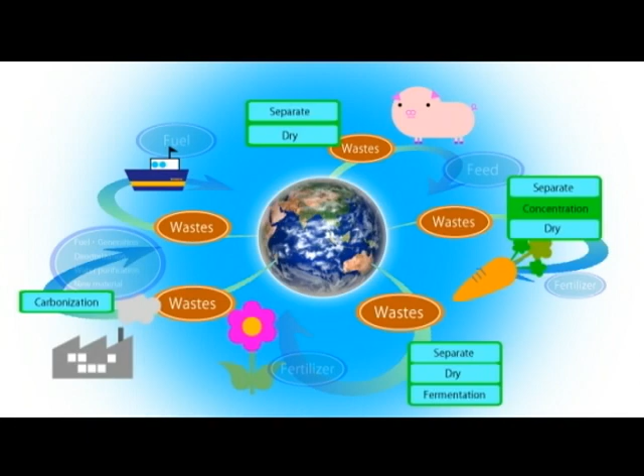In such a critical situation, it is an urgent task for us to effectively realize the 3R principle: reuse, reduce, and recycle. We can propose one solution of how to protect the earth, utilizing our 50 years of experience and know-how in this field. We can provide the most efficient equipment and systems to meet such needs.

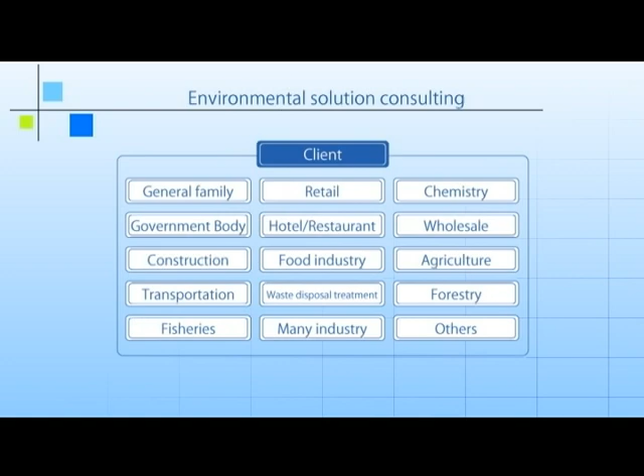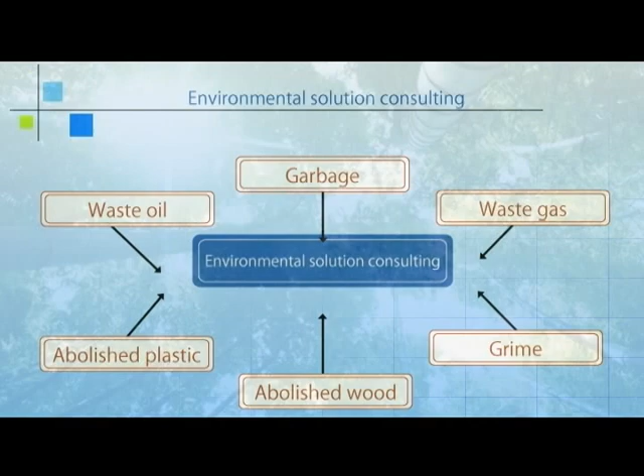Thus, we can help our customers to increase their own environmental activity by reducing their environmental load and also treatment costs. We believe that such efforts will lead to establishing a recycle-type society on a global scale. Kyoritsu can provide a technology to flexibly design and manufacture the equipment to recycle wastes, which can be installed even in a limited space of customers.

Let us then explain our original drying equipment, which can realize the most efficient recycling process. Kyoritsu Dryer System. This equipment can treat food garbage and sludge generated at food processing companies, medical facilities, hotels, and construction industries, etc., to reduce its volume to 1/5 in a short period of time. Its output can be utilized either as feedstock for domestic animals or fertilizer.

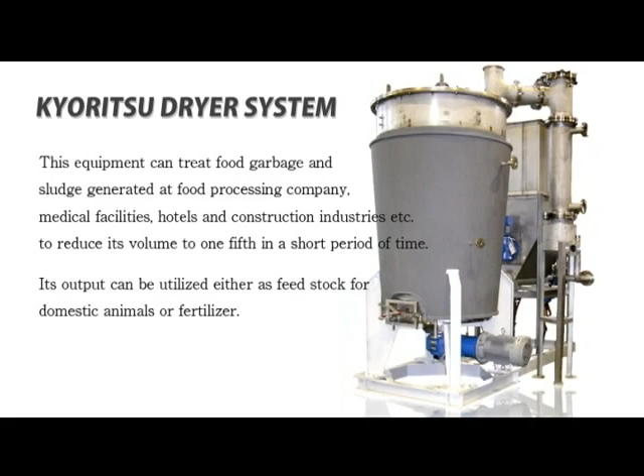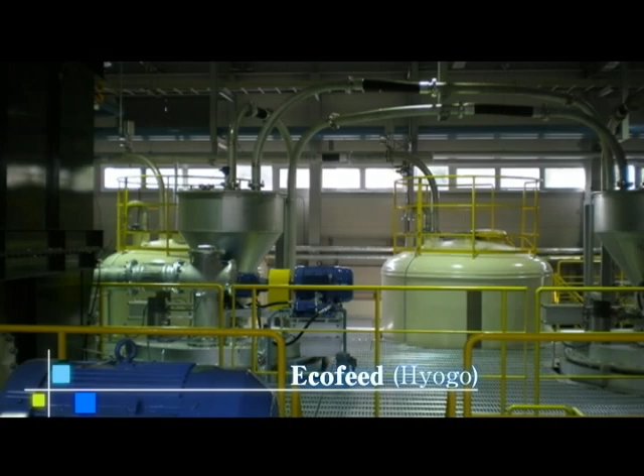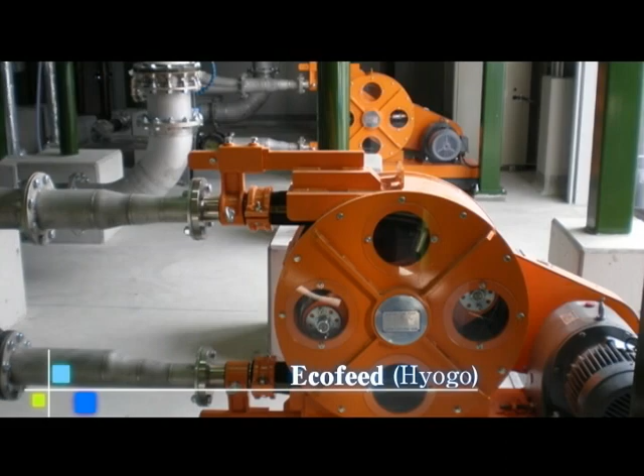We have recently successfully started the Eco-Feed project in Hyogo Prefecture, which testifies to our cutting-edge recycling technology. Japanese food self-sufficiency ratio is the lowest among advanced countries, and moreover, we depend on import for most of our feedstock for animals. Unfortunately, however, most food wastes and expired materials are dumped. So there is a stronger call for recycling such materials to effectively use limited materials on Earth.

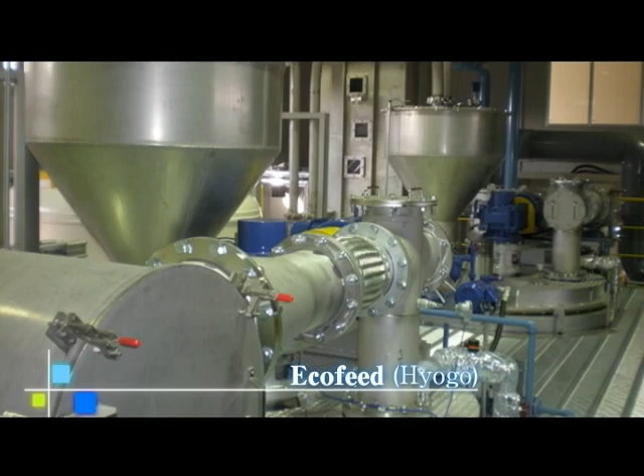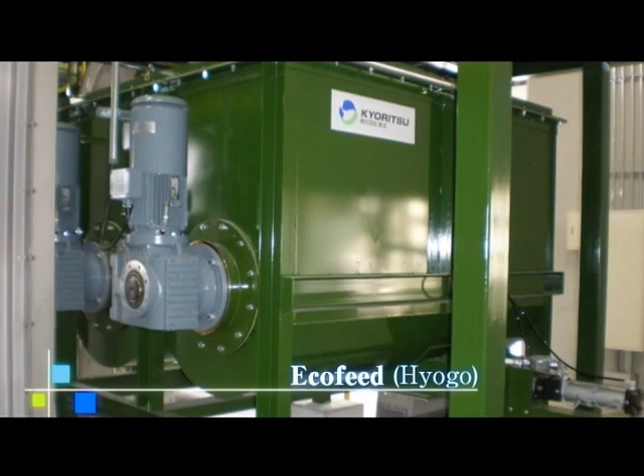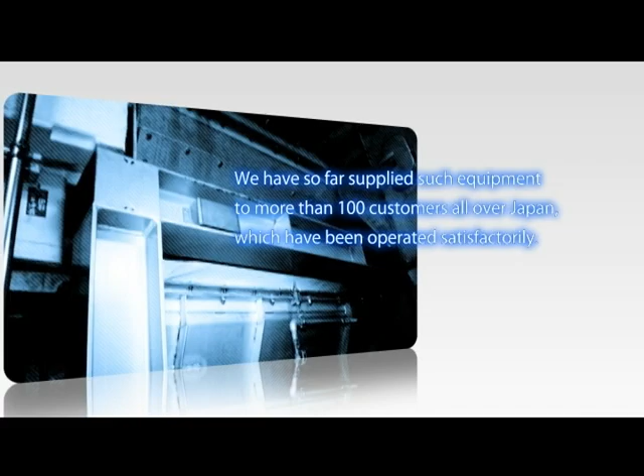A major characteristic is our capability to dry wet materials safely to comply with manufacturing standards, to meet the HACCP standard, and to ensure traceability of materials. We have so far supplied such equipment to more than 100 customers all over Japan, which have been operated satisfactorily. And now let us explain specifically what was introduced to the Prince Hotel in Tokyo.

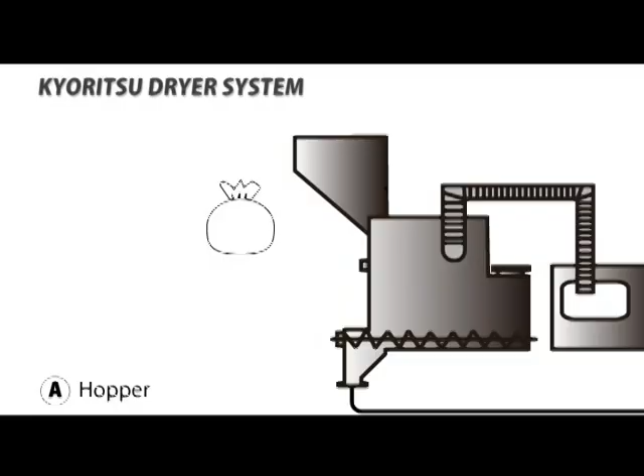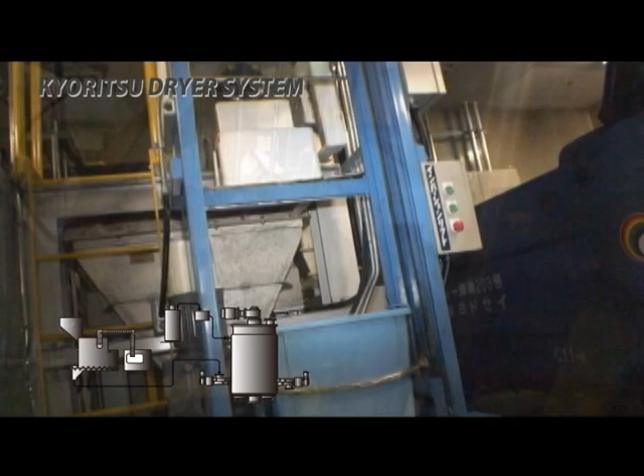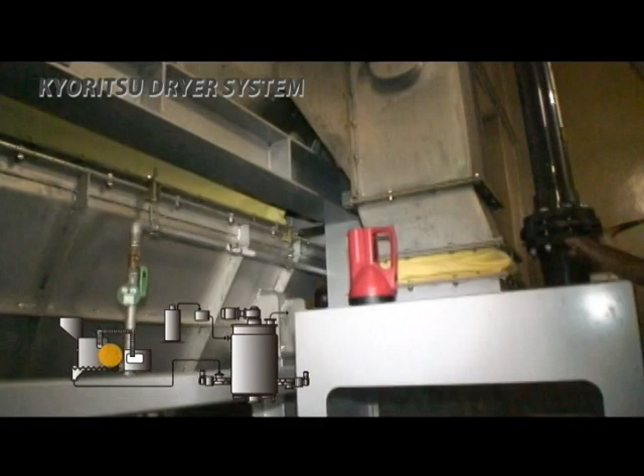First, food garbage generated at the restaurant of the hotel is put into the crusher, carried on the hopper together with packing and vinyl sheets, etc. Just push the button and it can be automatically separated from packing materials and sent to drying operation. We can remove foreign materials from food garbage as a pre-treatment facility of the dryer. It can realize more than 95% separation rate in terms of both weight and bulk density, and can treat a large volume quite quickly into a relatively compact size.

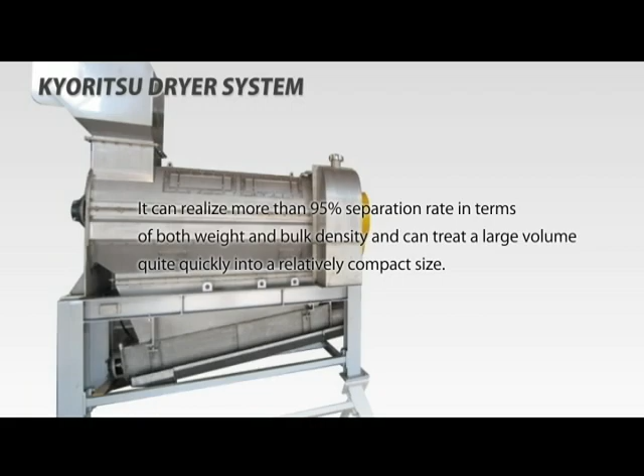You will be surprised to see that even metallic knives, forks, and spoons, and also ceramic containers can be successfully separated. Such high efficiency and durability is the very reason to justify our supply of equipment to many customers, including government bodies.

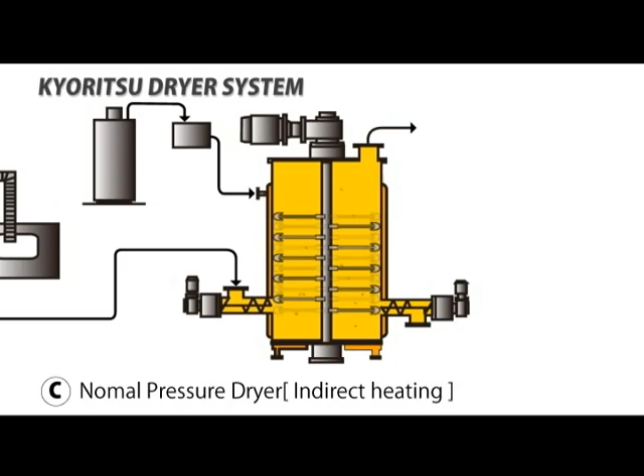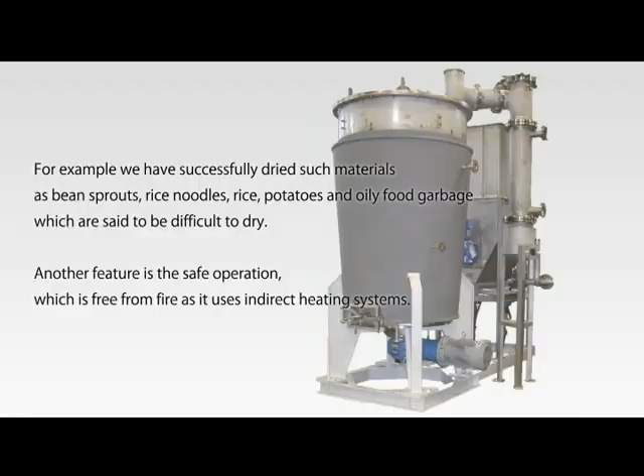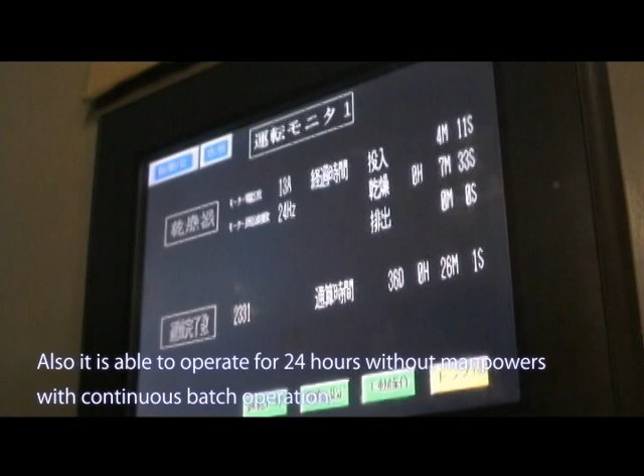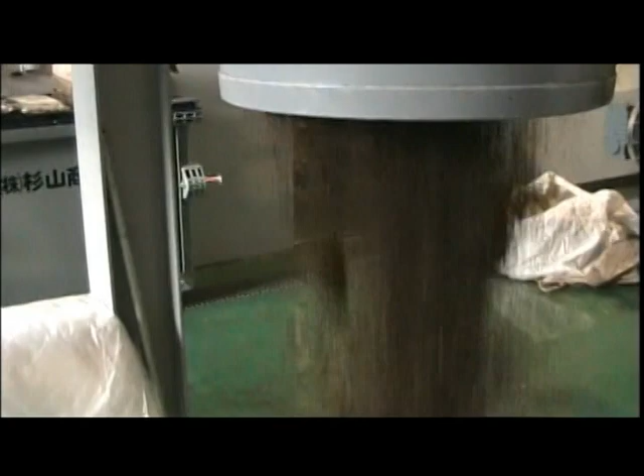Another feature is the safe operation, which is free from fire as it uses indirect heating systems. Also, it is able to operate for 24 hours without manpower, with continuous batch operation. Now the dried output treated by our systems is available. It is only 20% of the weight of the original food garbage and can be stored for a long time in its dried condition. So it can be utilized either as feedstock for domestic animals or fertilizer. Isn't this a perfect solution to realize the 3 R's?

Our customers can enjoy the following advantages if they introduce our equipment and systems. Reduction of treatment costs and generation of new materials as output becomes of value. Meet related regulations and ISO 14000. No need to issue a manifest because they become valuables instead of wastes. Improve corporate images who prioritize environment.

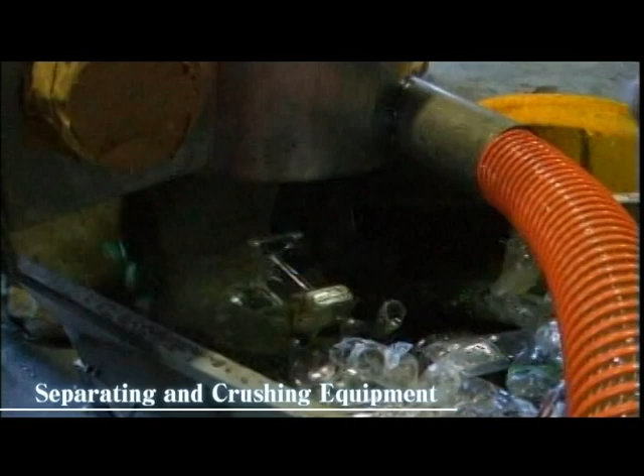Then let us explain our equipment. Separating and crushing equipment. With this equipment, we can successfully separate the PET bottle body from its cap and label, crush big-size food cans, and separate food from its packaging.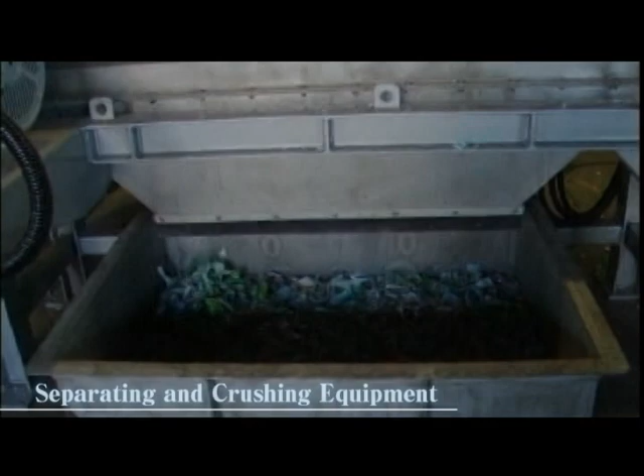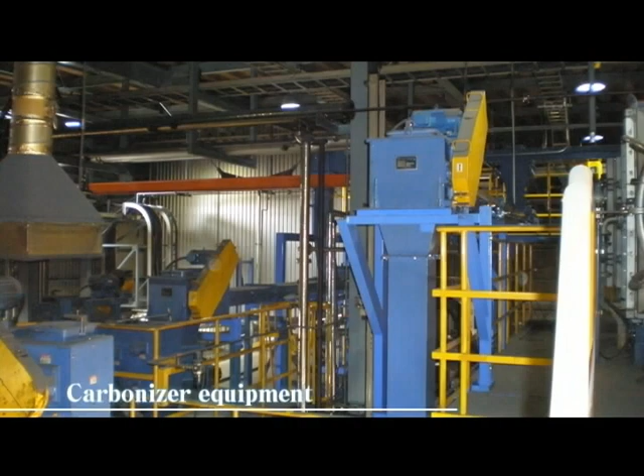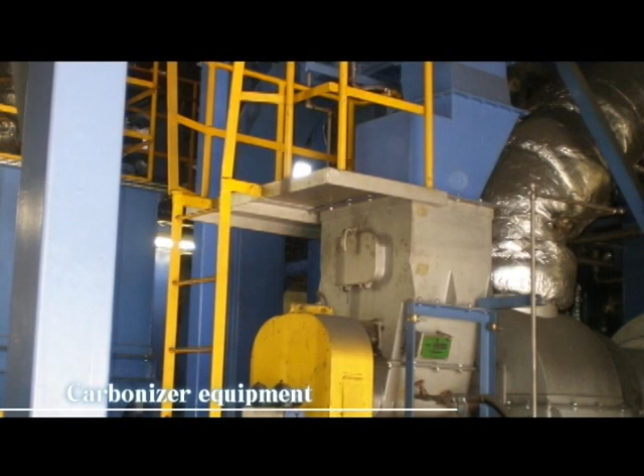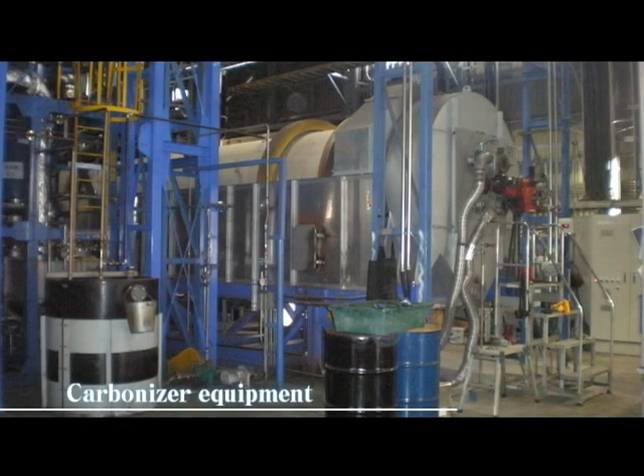Carbonizer equipment. Depending on input materials, the equipment can automatically judge operation time. Also equipped with CO2 gas and temperature measurement apparatus that automatically records gas amounts and temperatures. You can just push a switch button to see its output automatically after carbonizing. Continuous operation makes it possible to realize energy saving of larger volume and also generates new energy by utilizing waste heat.

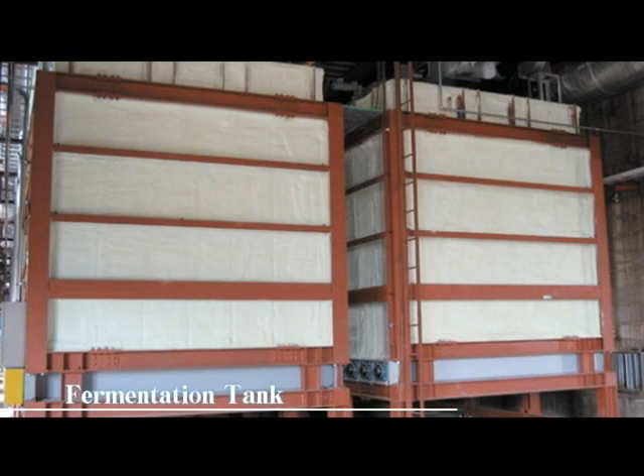Fermentation tank. It can produce high-quality fertilizer using less energy and smaller space. Since fermentation heat comes out, we can use almost no energy to operate the equipment. With automatic feeding and drain out, we can realize manpower saving and also automatic operation to control temperature in the tank. In addition, we can realize automatic feeding as the total process is a continuous operation.

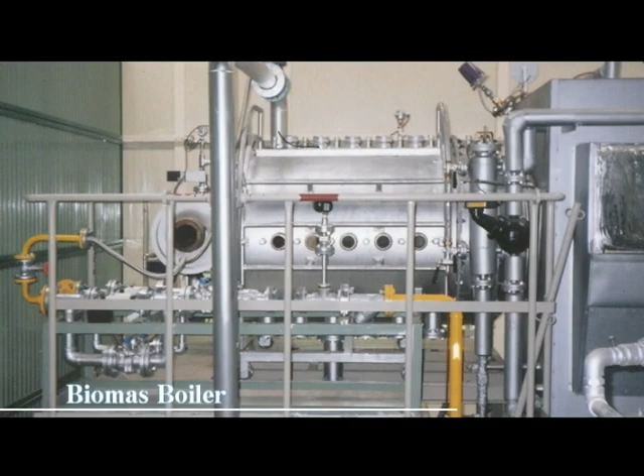Biomass boiler. We can provide a biomass boiler using biomass energy like food wastes, used oil, waste wood, etc. to generate steam and hot water.

Summing up, we can say that Kyoritsu can provide a totally tailor-made system to meet specific needs of customers, and also achieve cost reduction by total designing of the system. We can make a total solution to propose planning, design, manufacture, and operation for whatever industrial wastes the customer may have, to contribute to development of the recycling business.